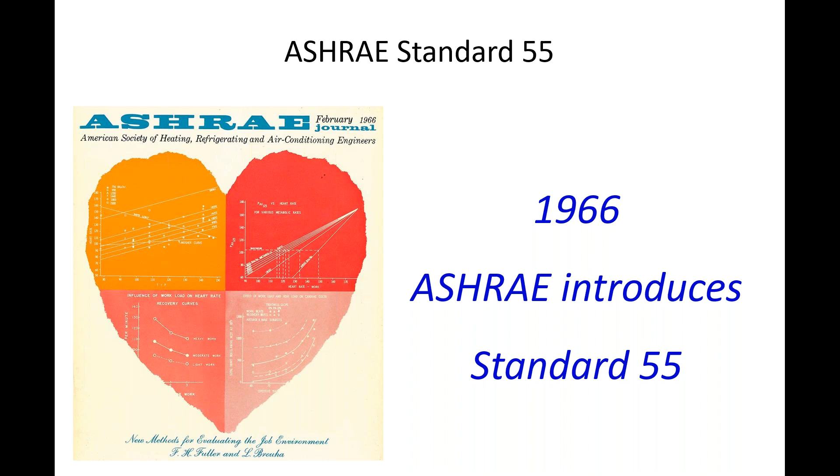What really brings us together as a global community is that we all have a common client, which is the occupant, and the standards have been developed by a global community of researchers. So it's a very important document.

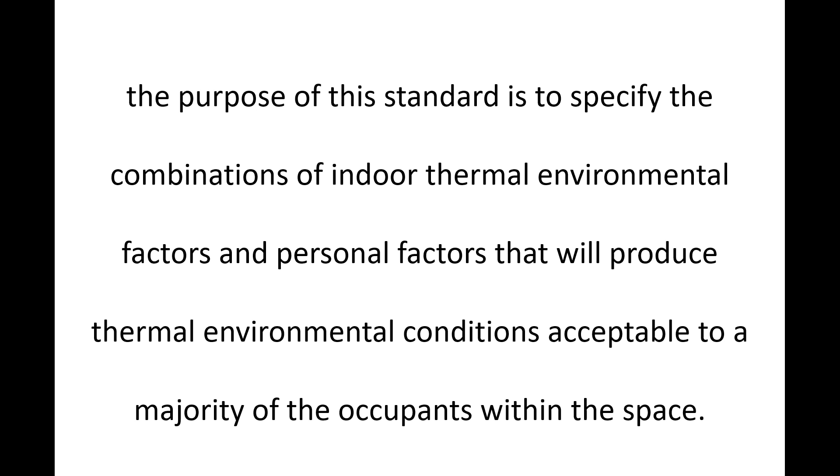The purpose of the standard was already read to you, so we won't spend too much on this, but we are trying to satisfy the majority of the occupants. One of the most important statements out of this is this concept of condition of mind, and you're going to see why this is incredibly important as we get to the mid part of the presentation.

First thing first, everybody, it doesn't matter where you are in the world, we all have very similar abilities to sense our environment. The physiology that we have is the same. And then we develop perceptions, based not only on our shared physiology but also our own personal experiences within the environments we're in.

From that perception we react, at a below-conscious level and an above-conscious level. So when we get overheated, we close the blinds, remove clothing, try to stay hydrated, try to find an elevated airspeed, cool surfaces to be next to. And if we get cold, we try to put on more clothes, increase the temperatures, try to find warmer radiant surfaces to be around. And so that is our reaction.

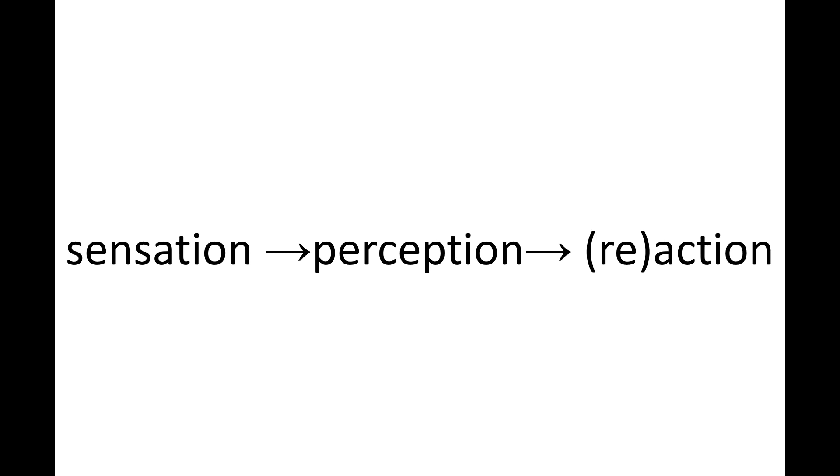But at a below-conscious level, the body already is controlling blood flow to and from the surface of the skin as a means of regulating the temperature. And this is done through regulation of hormones and our autonomic nervous system as it responds at a neurological level.

We won't get too much into the human physiology and psychology of it because this is more to do with the standard. But later this week, we're going to talk about the physiology in another presentation, and you can find information on that online.

One of the areas of debate has to do with the human body and the regulation of temperature. It's quite interesting because even within ASHRAE's own library, there is a conflict between the numbers. But if you look at the medical textbooks, the ASHRAE handbooks, the indoor environmental guidebooks, you will find that the dominant mechanism by which the human regulates its temperature, sensing and releasing, is through radiation.

This is why enclosure design is so important, because as practicing engineers and designers, we know that the differential temperature between two surfaces is going to be driven by the Stefan-Boltzmann constant and then also the emissivity and the delta T.

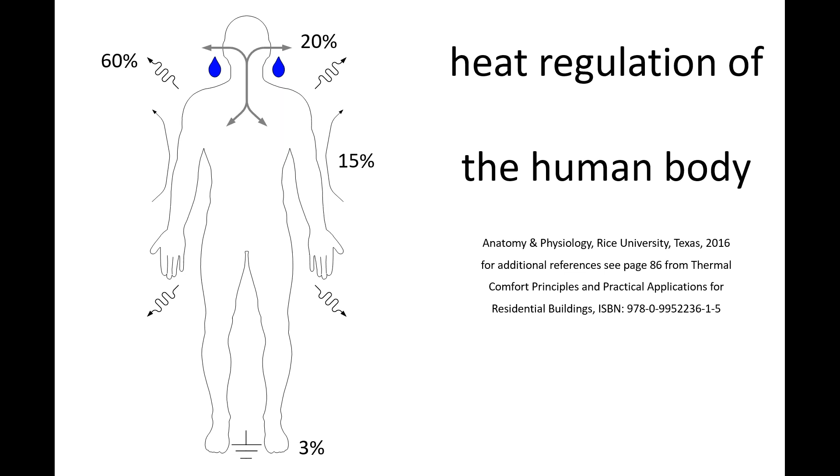The surrounding surfaces around us are incredibly important. It's only when you get into really high performance buildings or interior spaces that the dry bulb temperature, the air temperature, and the mean radiant temperature can often be assumed to be the same. But if you approach the exterior of the architecture, where there's a lot of glass, depending on what's happening outside, the inside surface temperatures can get incredibly hot, or where I'm from, incredibly cold, and this will have a huge impact on our radiant experience in the space. So it's important that we understand that.

As I mentioned, the neurological system and hormones in the body regulate temperature, and it's a beautiful system. If you think about it, the body doesn't need any batteries. You don't need to read a 27-page programmable thermostat manual usually written in a tiny font, very difficult to read. As long as we stay healthy, the body will do its own control to regulate the core temperature so that we are in a place of homeostasis.

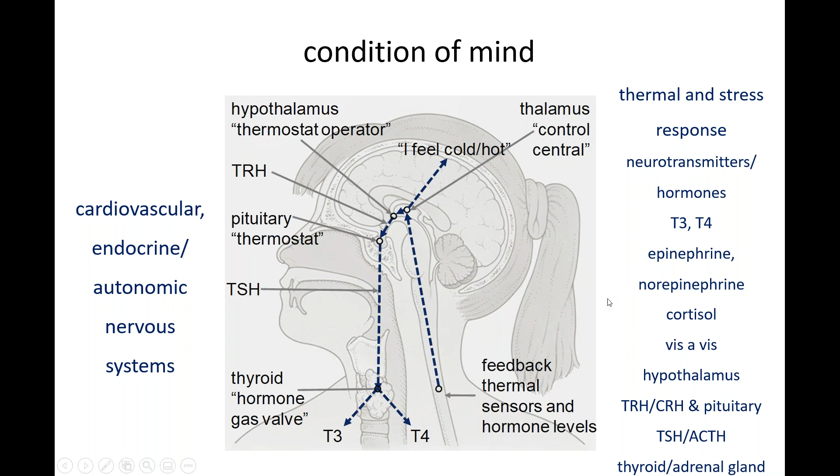I'd suggest for those online that you join us later on Thursday to learn more about this - we'll go into it in detail. If you can't join us, I'd suggest you go online and within half an hour or an hour of study, you'll learn about the physiology and psychology of thermal comfort as it relates to our own bodies and how we sense, perceive, and respond at a below-conscious level.

One thing we see often all over the world is the tension between what building codes require for thermal comfort and what people actually experience. It's amazing that building codes for the most part establish the lowest requirement before there's a failure. So in the education world we'd say you can operate or design a building to a D grade, the lowest grade before failure.

That D grade says we should do heating and cooling load calculations, take some air out, put some air in, and as long as the control device, typically a thermostat, can maintain 22, 24, or 18 degrees depending on what part of the world you're from, you'd be in compliance with the code. This is often interpreted as being a proxy for thermal comfort.

But the reality is that people in the space experience much more dynamic environments. The sun shows up every day and loads the building with shortwave radiation, some of which comes through the glass depending on the solar heat gain coefficient, and that energy is absorbed and then re-released into the space as long wave radiation. We also have sunlight hitting the solid surfaces of the building, getting conducted through, warming up the inside surfaces, which also get released as long wave radiation. So you have shortwave radiation and long wave radiation.

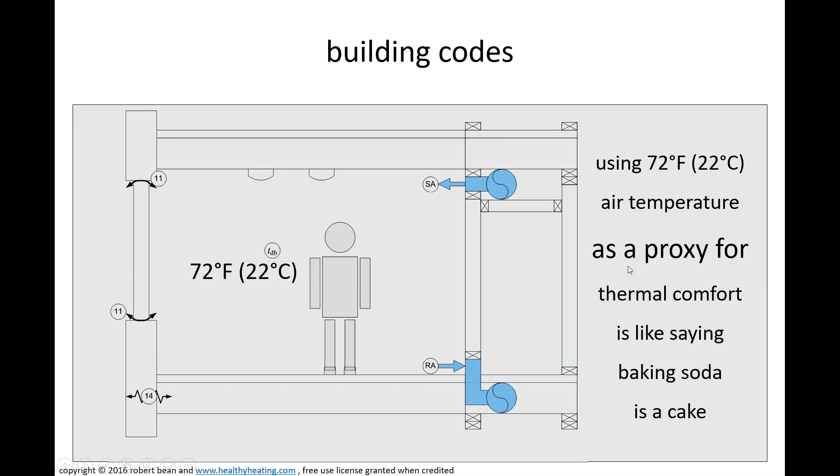This is reality, where this is not - the building codes do not represent what people actually experience in a space, but ASHRAE 55 does, and this is what the standard is all about. Often people, particularly if new to it, can get intimidated by what's going on, but the reality is that if we just sit still in a room and enjoy our sensory experience as a human, we will experience all of the things that are in Standard 55.

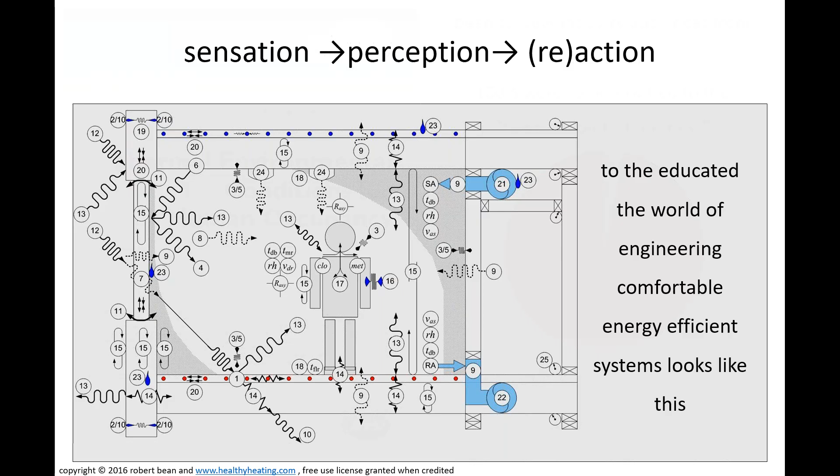So though it might seem complicated, in reality each of us, wherever we are in the world, whatever building we're in or in the outside world, we experience all of these elements. So Standard 55 really defines those conditions - what conditions we need to create so that we have a higher probability of people being comfortable as opposed to uncomfortable.

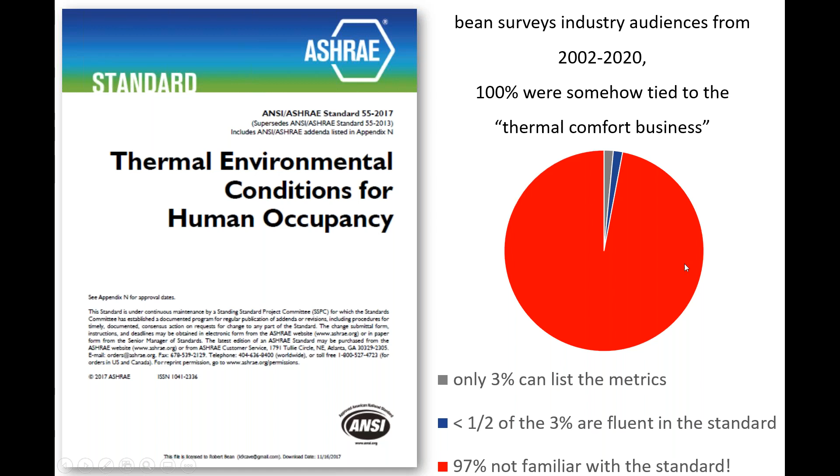This is a shock that we've seen such low literacy in the standard when that's in fact one of the most important ones we have. So I'm really pleased to hear we had something like over 1,300 registrants from your chapter efforts to bring people to this seminar. Congratulations on having so many people participate and learning about the standard, so you can now go apply it to your own practices and for the benefit of your client.

We know the Center for the Built Environment and other organizations around the world that have done research papers on post-occupancy surveys find there's incredibly low compliance with thermal comfort standards. When you think 80% to 90% satisfaction is the target rate, and yet we're only hitting maybe 2, 3, 5, something like 8%. Not very impressive. In fact, if any other industry, like the automobile industry, had only 8% satisfaction with their products, it would quickly be out of business.

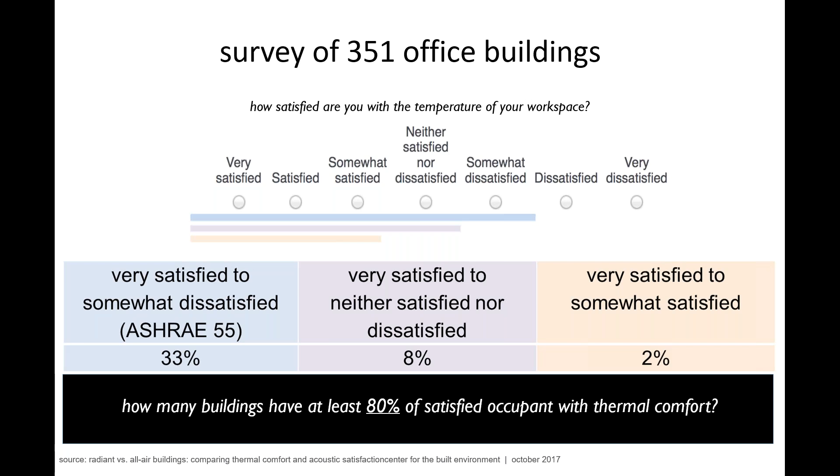So these are the things we need to address. We know what works and we know what doesn't work, and unfortunately we're right now in a state where we're developing lots of buildings that don't work when we know better. Part of that is us as a design community being educated and communicating what we know about people in buildings to the architectural community and the development community, and that of course is going to take time.

I like to look at thermal comfort as a cake, and the ingredients of the cake are represented up here on your screen. It's funny that we see a lot of parts of the world where they'll use air temperature, the dry bulb temperature, as a surrogate for thermal comfort. Well, if you were baking a cake, that would be like saying baking soda is a cake. It's only one ingredient. With thermal comfort, it's the same.

You have lots of ingredients. When you get the ingredients right - when the humidity is right, the air temperature and the mean radiant temperature are right, and you understand what people are doing and wearing in the space, and you control temperature stratification, floor temperatures, and this asymmetry - that will have a much higher probability of people enjoying the space and not being stressed out by overheating and underheating.

This really ultimately comes down to the objective of the standard: to reduce the stress level associated with thermal discomfort. Studies tell us that people get distracted by bad indoor environments, and in that distraction, they lose their productivity. They also lose their ability, in the case of education, to focus on whatever learning is required - maybe an exam, maybe studying engineering - these bad environments become a distraction, and they can lead to stress.

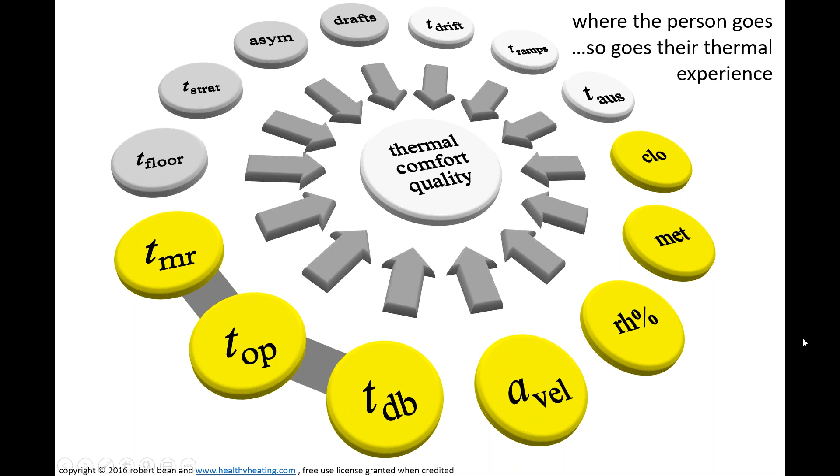We know the stress at a residential level and even within office spaces can be high between colleagues as you develop these wars, these battles - which is not gender-based, by the way, it's more to do with the clothing than anything else. So these, in fact, are the ingredients, and we can summarize them in a table looking at the two personal factors: what are people doing in the space and what are they wearing? We have what's called within the standard the representative occupant - the modeling voice that says, okay, I am this person in this space doing this activity, wearing these clothes, and I will represent all the other people in the space in the same scenario. But if that changes, if the clothing changes or the person does something different, now you have two situations to evaluate.

We have the general environmental factors - these are applied in all assessments. Whenever you do a compliance check to ASHRAE Standard 55, you have to look at these 4 conditions: the air temperature, the mean radiant temperature - which is the surfaces around the person and how that influences the radiant exchange from the occupant to these indoor surfaces - the humidity, and the airspeed. I should also point out that these values, when we do a compliance assessment, always relate to the person, so where the person goes, so goes their experience of the space. When we talk about mean radiant temperature and dry bulb temperature together, when you marry them, it's called the operative temperature.

This is in fact what people sense as the operative temperature—not dry bulb, not mean radiant, but the two of them together. So where the person goes, so goes the operative temperature. And because operative temperature includes MRT, where the person goes, so goes the MRT. So this is what's really important.

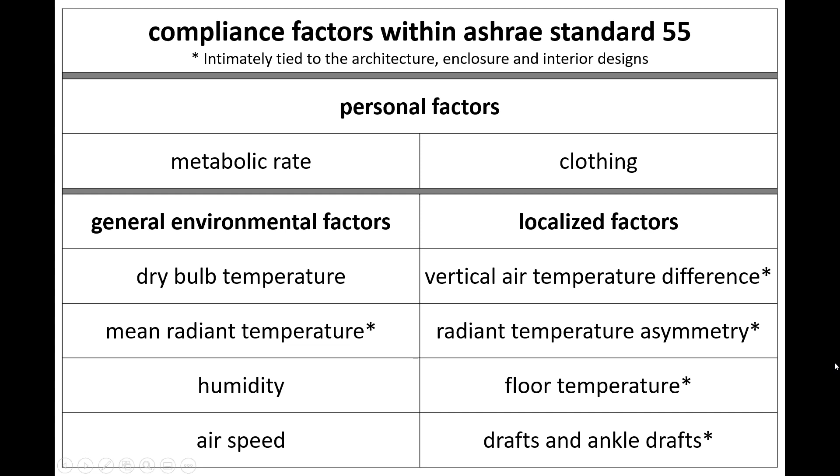So all of these together, I want you to see as the ingredients in the thermal comfort cake. And when we get these things correct, we have a much higher probability of having happier occupants.

That really was the study of Dr. Fanger and all of his predecessors and colleagues around the world, and of course his work at the Danish Technical University. They looked at it and said, well, if we get everything right—the architecture right, the enclosure design right, the interior design right, and the mechanical systems—then the probability of people voting on a scale from neutral to hot or neutral to cold is that they will vote mainly between slightly cool and slightly warm.

We say that's sort of the 0 plus or minus 0.5 on the predicted mean vote, PMV. And what they then did is tie the PMV to what's called the PPD, or the predicted percentage dissatisfied. So we know that when we get everything correct, those voting in the 0 to plus or minus 0.5 range, there will be a very low amount of people dissatisfied.

But if we start to get any of the criteria incorrect—large mean radiant temperatures due to large window-to-wall ratios, poor fenestration performance, or thermal bridging in cold climates, all of these types of things—people will start to vote at a much more aggressive number. So they'll go from, say, neutral or slightly cool to cold, or up to warm or hot. And of course these numbers then correlate to much higher dissatisfaction.

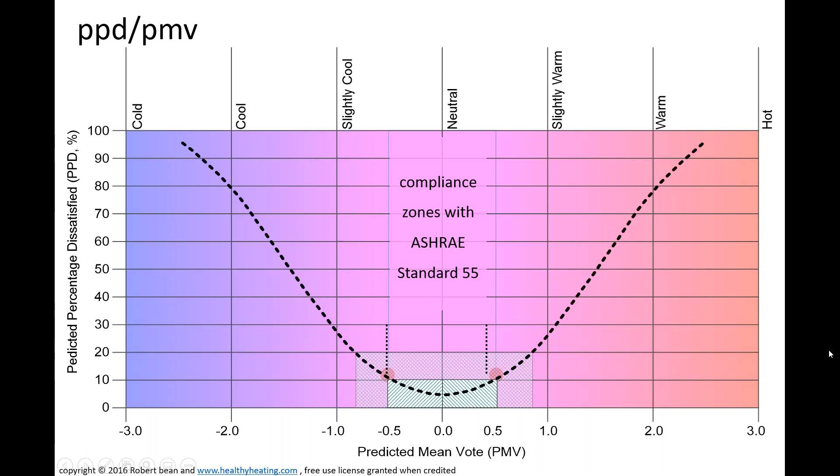So we know from our own worlds of design and practice what buildings work and what buildings don't work, and we can actually make these predictions before we start excavation of the building. This is important—that we have these discussions ahead of time with the client, not during construction, not after occupancy, but before the design.

So clothing plays a big, big role, and we see this all over the world. The news people particularly want to make the thermostat war a gender issue, but it's not a gender issue at all. It has a lot to do with the clothing, and we can see in office spaces all over the world that when you take males and females in a space together, oftentimes, depending on your culture, the females will be wearing a little bit less clothing than the males.

The males will be more formally attired, sometimes ties, jackets, these types of things. The women will be wearing dresses, skirts, blouses—more lighter clothing. And it's the clothing that makes the big difference. There are some small physiological differences, but that does not explain the discomfort or the tension we see in office spaces or homes around the world. That has more to do with the clothing than gender differences.

And this, of course—it's funny because every couple of years a research project will come out supporting a statement about female versus male physiology differences and preferences. But when you dive deep into the research, you find flawed research. For example, they may have only studied females and never had a male cohort study to balance that out. Or both genders are brought into a research facility but not told to wear the same clothing, so they show up with their own personal preference of clothing. Then this research gets interpreted incorrectly as a gender issue, when in fact it wasn't.

Mean radiant temperature - ASHRAE standards handbooks tell us that at the low velocities typically found in buildings, up to 60% of the sensible heat exchange is radiant. So we can't ignore that radiant element. It is in fact the dominant mechanism.

So inside surface temperatures matter a lot. We have to be very aware of window-to-wall ratios and solar heat gain coefficients, and make sure that the structures we build don't encourage lots of thermal bridging.

As we know, the #1 rule in building science is what's on the outside wants in, what's on the inside wants out. On the outside is the sun, and that's a lot of energy it can dump onto a building - 700, 800, 900 watts per square meter. That energy will want to get inside, and of course that's going to affect the surface temperatures.

So we have to be able to control that with proper architectural design, making sure we try not to be so flamboyant that we can no longer control what happens inside the spaces.

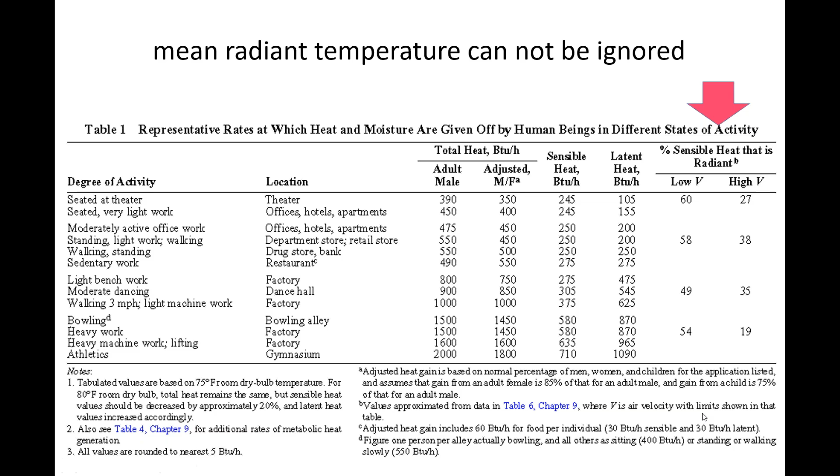This mean radiant temperature gets married to the dry bulb temperature, and you can then have what's called operative temperature. Operative temperature is in fact what people sense, so it's very much a balance. If the dry bulb goes down, the mean radiant temperature has to come up. If the MRT goes down, the dry bulb has to come up in order to maintain that operative temperature.

I've simply taken 3 examples of 3 operative temperatures based on the relationship between dry bulb and mean radiant. You'll have this when you download the slides or have the recording, and you can see how this works.

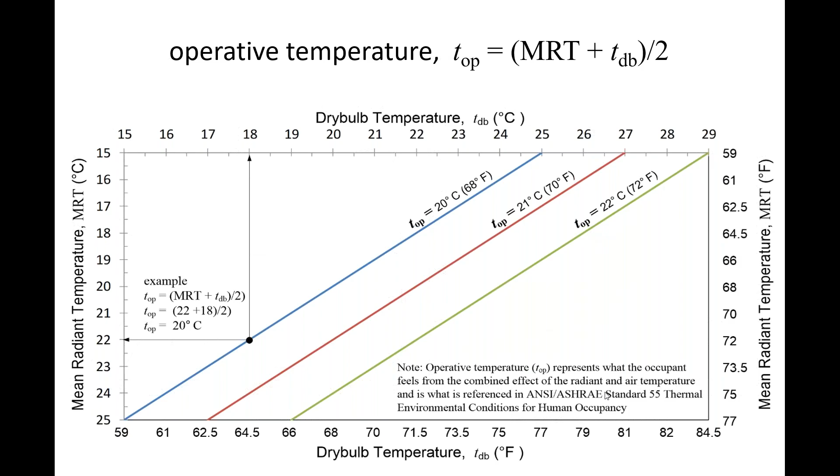In the perfect world, the dry bulb would equal the mean radiant temperature, but that only occurs in the interior spaces of buildings, or in really high-performance enclosures where we have very low fluxes.

In the real world, the sun is dynamic - it transits, it moves - so the temperature will also be dynamic and change. It's very ambiguous, people's experience in the space as a result of any radiant influence. If you can control the radiant influence, then of course you can make it very homogenous.

You don't have these battles, but people like to see nice, beautiful views, and so we have these flaws, these weak points in the building. Until we get that fixed, we will see ambiguity within the thermal environment as long as we see it.

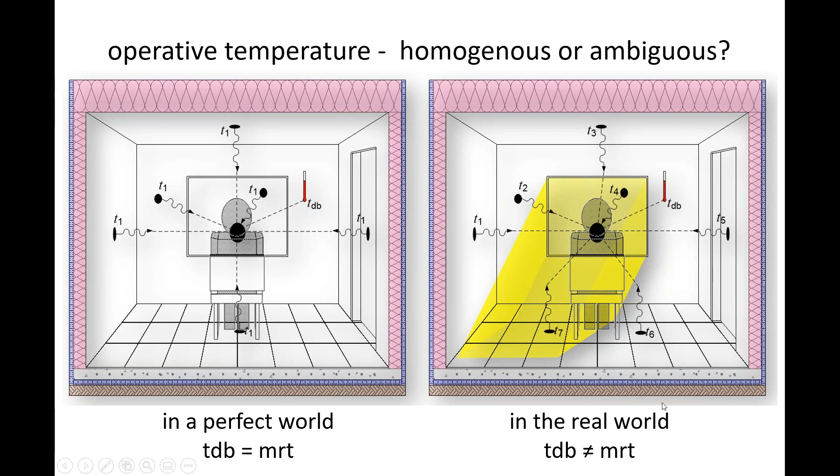But that also creates other problems, like the destruction of interior finishes. If you want to destroy a synthetic carpet, for example, all you have to do is hit it with shortwave radiation - it turns into gases and particles. So now you have an indoor air quality problem. You have a lighting problem, an air quality problem, and a thermal comfort problem, all because of overglazed architecture.

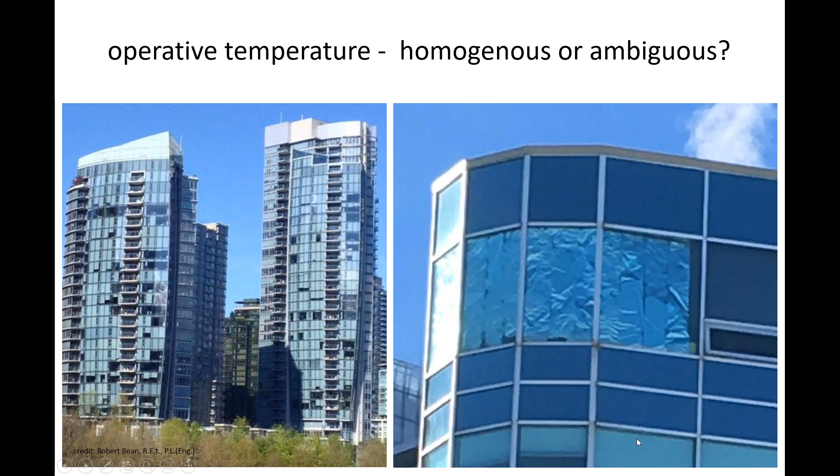These glass buildings are also very good at transmitting sound, so when you have lots of glass, it's very difficult to control the sound - you have sound problems. So we have to really challenge the architectural community globally on these styles. Is it really necessary to have these glass buildings?

Just to put it into perspective, I was told today that in Dubai it was like 45 degrees Celsius. We never get to 45. On a good day in Calgary we might get to 25 degrees Celsius - like today it will be 17 or 18 degrees C.

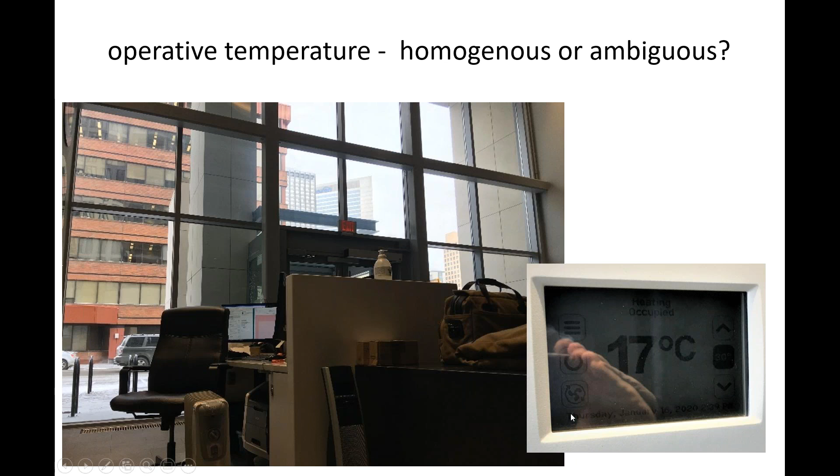That's a nice day for us. If we can get to 25, it's a great day. But in the wintertime, we design for minus 35, minus 40 degrees Celsius, incredibly cold. You throw a cup of coffee in the air, it freezes and crystallizes before it hits the ground. And so we have architects here, like everywhere else, that want to use a lot of glass. There's no way we can provide comfort in these spaces. You can blow hot air into a room like this all day long, that glass temperature, even if it's high performance glass, triple pane, triple sealed, argon filled, doesn't matter. The glass inside surface temperature at minus 40 degrees Celsius will be approaching somewhere around 8 to 10 degrees C. It's incredibly cold, so that's important.

Also important is humidity, and for many reasons we need to control it. That's a big discussion these days with COVID-19, maintaining this 40 to 60 range. I personally like to say 35 to 55, plus or minus 5%, which gives us some wiggle room. This mid-range has been demonstrated in laboratories, research work, and also in projects like hospitals, that virus transmission is much lower with these mid-range humidities. There's many reasons to control humidity, including thermal comfort, which we'll show you later.

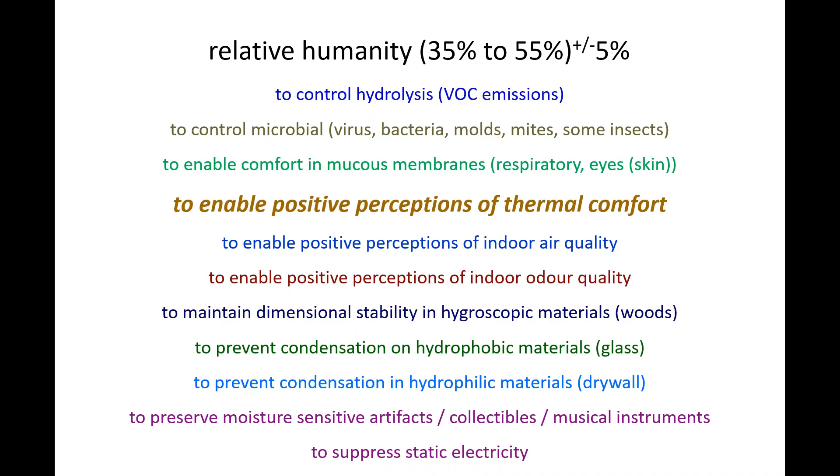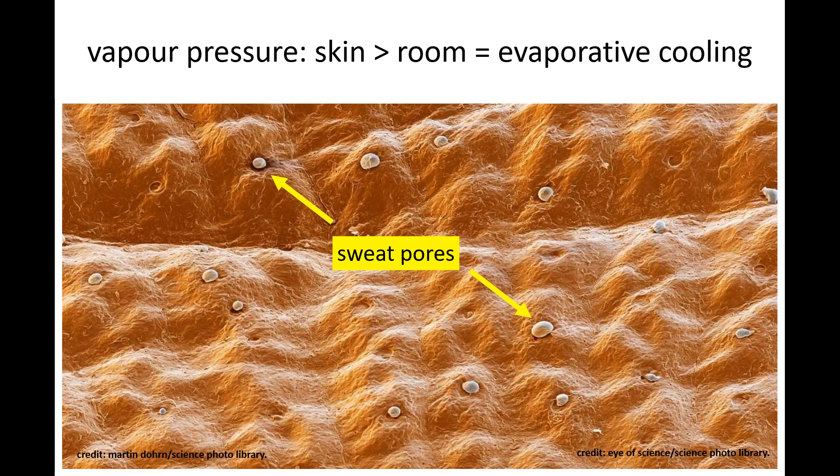Humidity in terms of thermal comfort controls the vapor pressure in the room. If someone is overheating, and the vapor pressure on the skin is higher than the vapor pressure in the room, then the release of moisture through sweat and perspiration takes with it both sensible and latent heat, and in that process we get cooling. But if the vapor pressure in the room is high because of moisture content, that gets suppressed, and the body can no longer cool itself through evaporative cooling, so it begins to overheat. Humidity control is important.

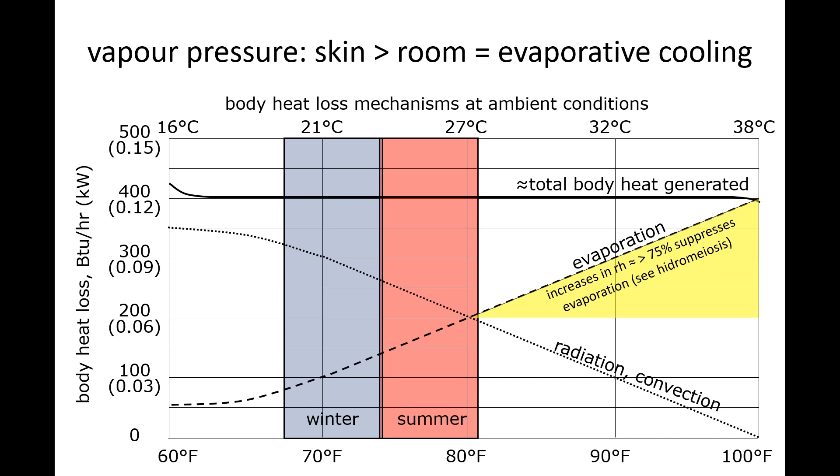We know that when you get into the higher temperature ranges, say 25, 26, 27 degrees, the body shifts from radiant and convective cooling to more evaporative cooling. Of course, evaporative cooling works only if the vapor pressure in the room is lower than the vapor pressure on the skin. This is why we need to control humidity if we want to actually cool.

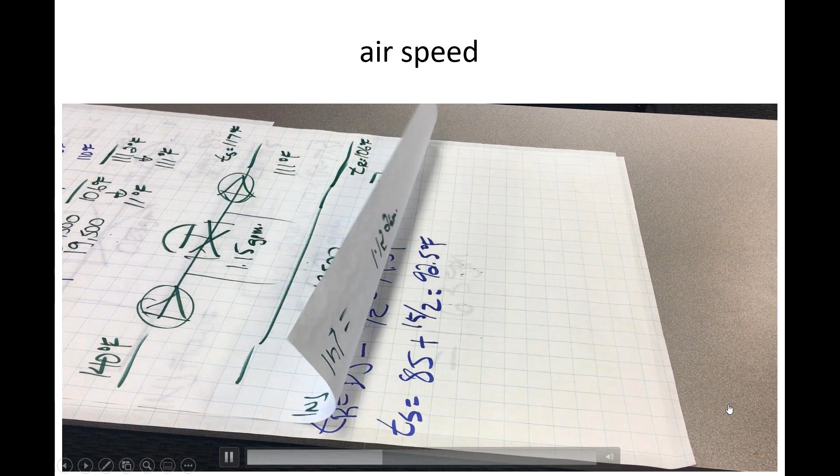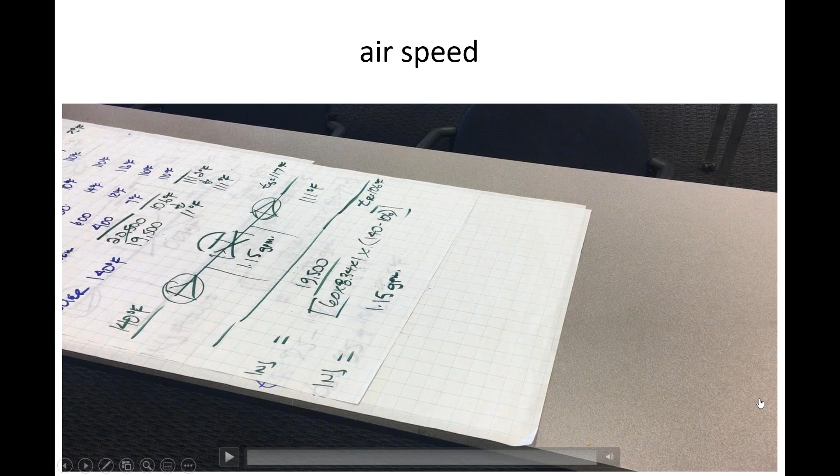The other thing is airspeed, and I'm going to play this animation. This was actually in a room on a person's desk. We were doing some training, and that's the formula that's there in the drawings. This airflow can be comfortable for many people if the room is warm and humid, and if they're wearing lighter clothing, this air velocity can provide some convective cooling. But in the wintertime where I'm from, this would not be comfortable at all. It would cause a tremendous amount of discomfort having these kinds of airspeeds.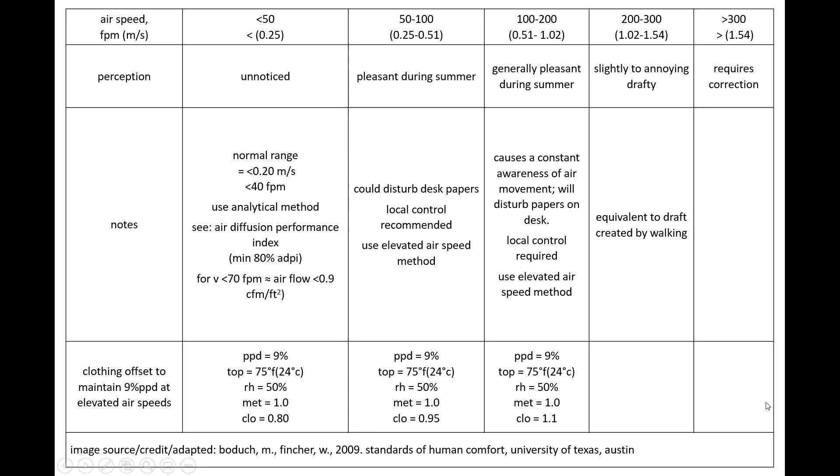This becomes a bit of an issue for us, and one of my current concerns has to do again with COVID-19: will the use of elevated air speeds cause an increase in transmission of the virus in indoor spaces? We don't know this yet, but it's a question mark.

Then we have what's called radiant asymmetry. Radiant asymmetry is the experience a person has when they're exposed to different surface temperatures on either side of them or above them—warm ceiling, cold floor, warm wall, cold wall. The body doesn't like it when the values are extreme. So let's take, for example, someone in India who maybe has an office building with a very large window-to-wall ratio, and the occupant is close to that window.

It's quite possible that the inside surface temperature of that glass is very, very high. And if that building is air conditioned, there will be an opposite temperature effect on the other side of the person. Having the experience of hot on one side and cold on the other causes discomfort, and the body does not like having such large changes. We call that radiant asymmetry.

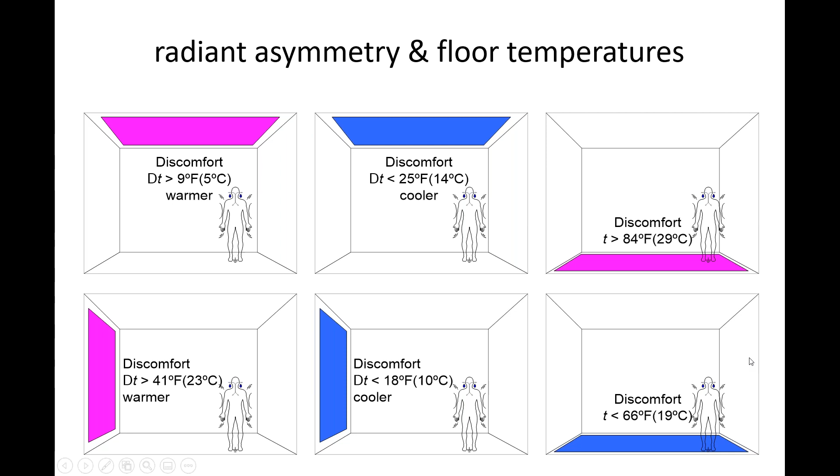In low activities and low clothing, floor temperatures have to be considered. From the work that Bjarne Olesen and Fanger and others did in their studies, we know we don't want floors providing heating to exceed 29 degrees Celsius or 84 degrees Fahrenheit. And from a cooling perspective, we don't want temperatures lower than 19 degrees C or 66 degrees Fahrenheit. Otherwise, the percentage of people who complain will increase as a function of these temperatures.

Here are some examples. Again, I'm from a cold climate, so a lot of the pictures you're going to see are from my experience, so maybe you'll feel sorry for me. When we get to minus 40, if you see that in the news, just send us some warm weather, because we need it. But when it gets really cold outside, you can have these cold walls.

In this case, they're using glass block construction, and they're compensating for this discomfort with radiant heating. But the radiant heating also provides that other extreme. You can imagine the radiant asymmetry that occurs in the space, but also the floor temperature.

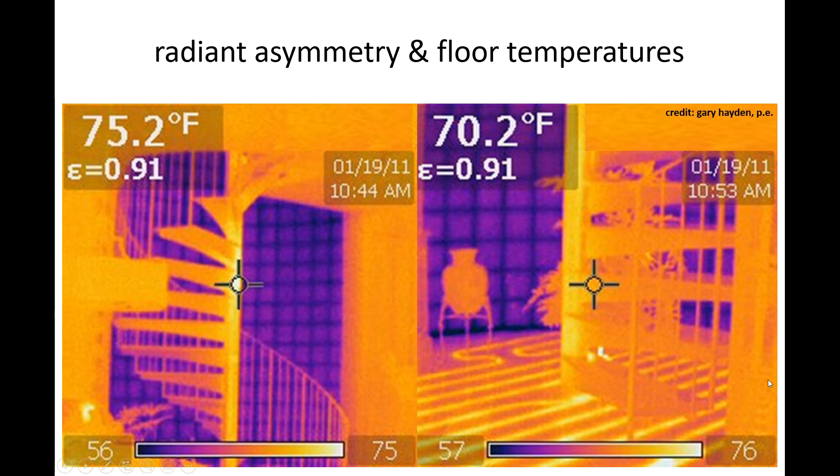Now, this space that you're seeing here, though, is not occupied for more than 15 minutes. The standard basically says if it's just a transitory space, like someone walking through it, the standard does not apply. The person has to be in there for some period of time for the standard to apply. So even though you might have spaces like this with problems of radiant asymmetry, if no one's occupying the space, we're just conditioning it and the person walks through to wherever they're going—not a problem.

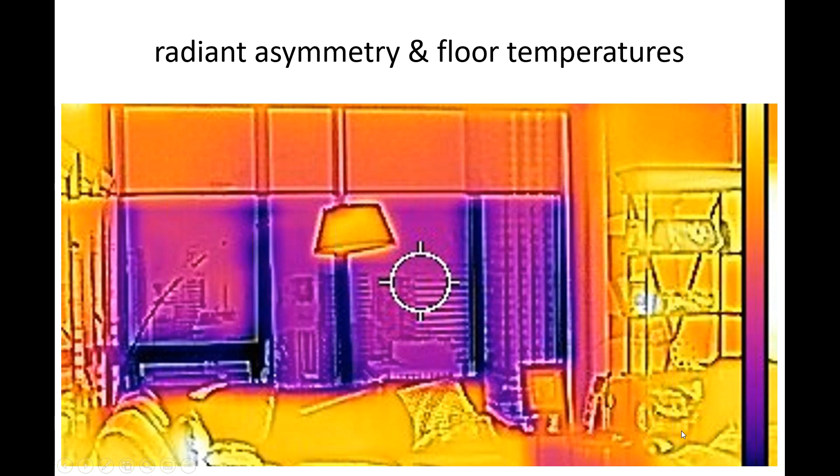But we see asymmetry when we get into, say, condominiums. This is a place where there's a large window-to-wall ratio, and the fenestration is not the best. In this case, it's a heating mode where the outside is very cold and inside you can feel asymmetry there. You'll also get draft in this case as well.

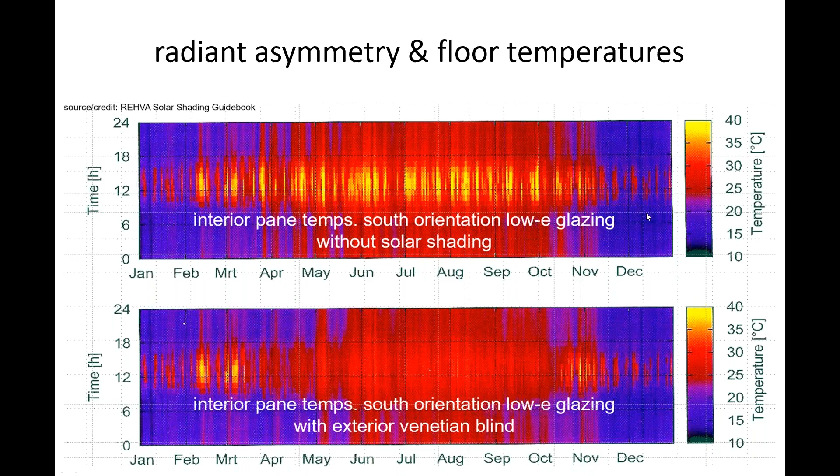Here's an example that came out of the REHVA guidebook. I love this illustration because it looked at interior pane temperatures with or without solar shading. You can see there are some incredibly intense temperatures on some of these inside surfaces, 40 degrees Celsius. That's a warm surface temperature to have to work next to in the summertime. So controlling that is important.

And the stratification—again, the temperature difference between the ankles and the head. You should know that the standard goes through reviews and revisions on a regular basis, and one of the things we are evaluating right now is that stratification number. We're considering allowing a much more aggressive difference compared to what the old document tells us, but it still needs to be considered.

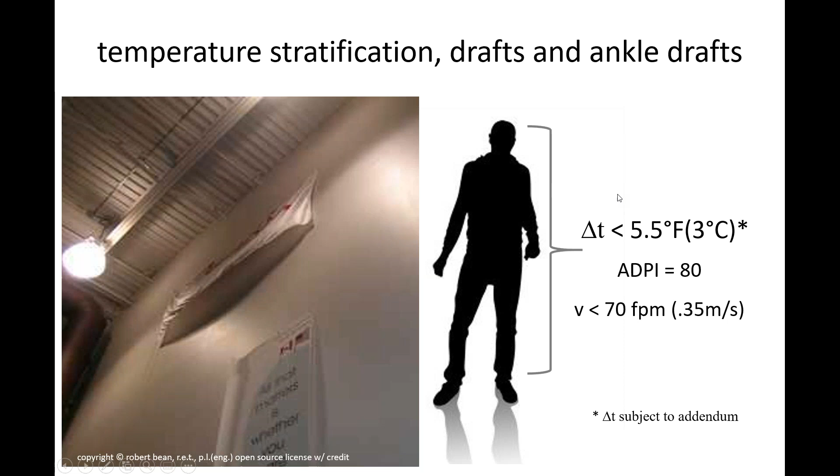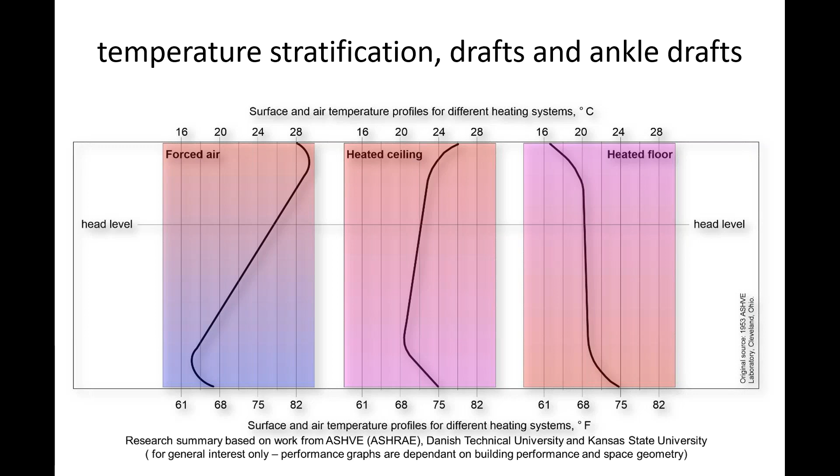We know different types of heating systems create different temperature profiles, but this is also a function of the building. When you get bad buildings with air-based systems, you're going to have a different stratification than if you have a really high performance building with another type of heating system. So the heating systems matter, the architecture matters, the mean radiant temperature matters—all of these affect the stratification.

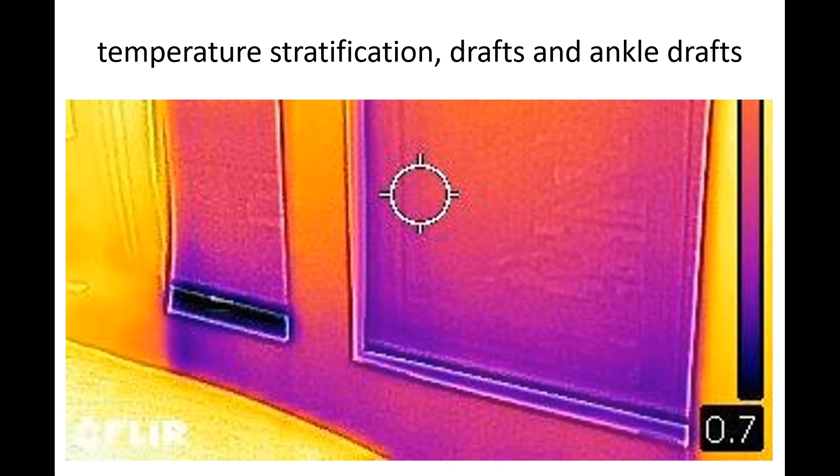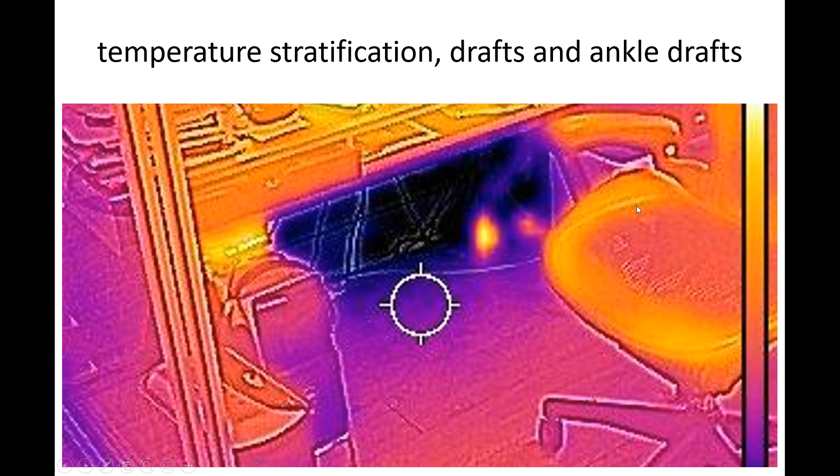Then of course there are drafts—warm temperature hitting a cold surface changes the density, having the air drop down; same thing with cold hitting warm, changing the density and having it rise up. So you get this air movement as the mass of the air changes its density, and thus its buoyancy. Here, it's underneath someone's desk in a very cold climate. Again, the thermostat could read 20 or 22 degrees and be in compliance with the building code, but what the person experiences is something completely uncomfortable because of flaws in the architecture and enclosure design.

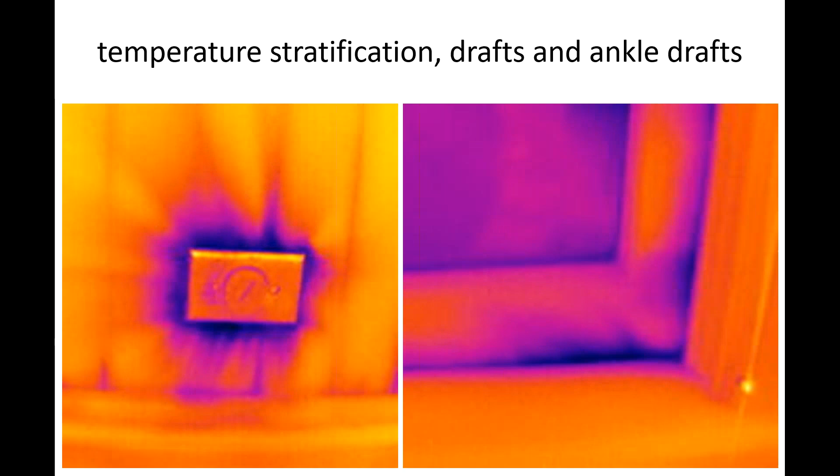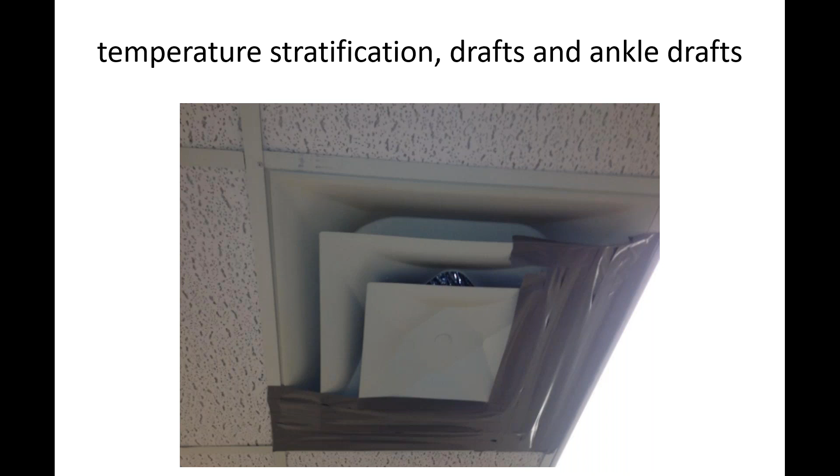Same thing with infiltration and exfiltration through building features like doors, seals around windows, electrical plates. All of these will create discomfort, even though the control device might be perfectly satisfied. And then we get people who will do whatever it takes to become comfortable in space, controlling drafts by taping up the diffusers in the ceiling.

So that's sort of the standard. We have the general factors, the local factors, the personal factors—these are the ingredients of the cake. When we get the architecture right, the enclosure right, the interior design and mechanical right, then we'll have a high probability that people will be comfortable, or a low probability that people will be uncomfortable. And of course, that is the objective.

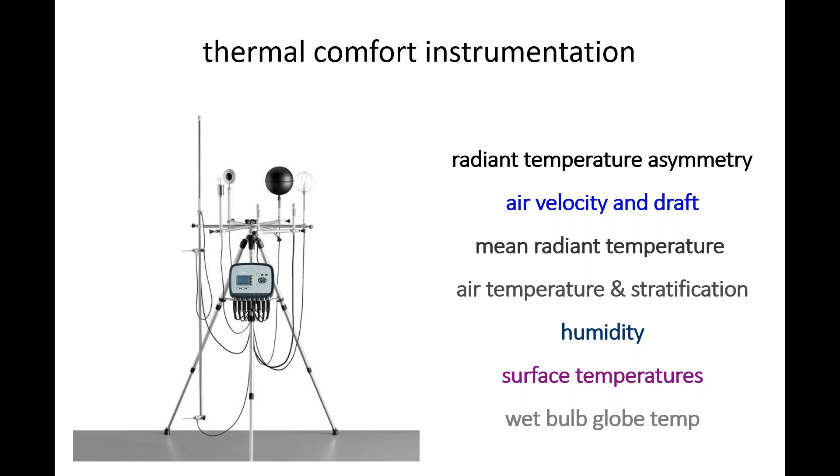These metrics can be sensed with instrumentation, so we can write the specification, measure it, and determine whether we're in compliance with the standard or not. One thing I do want to talk about: there is in the world of thermal comfort a discussion about these sort of static environments, and in fact, are they good for occupants or not?

The tension in this discussion is between the term homeostasis, the body's desire to be in a balanced state, and alliesthesia, which is the exercise the body gets from a thermal point of view. In other words, people who are out walking in hot, high temperatures outside develop an overheated sensation, but then they go inside where it's cool and air conditioned, and that change becomes something perceived to be incredibly desirable. There's a wonderful feeling of going from really hot to really cold, and that exercises the body's response system.

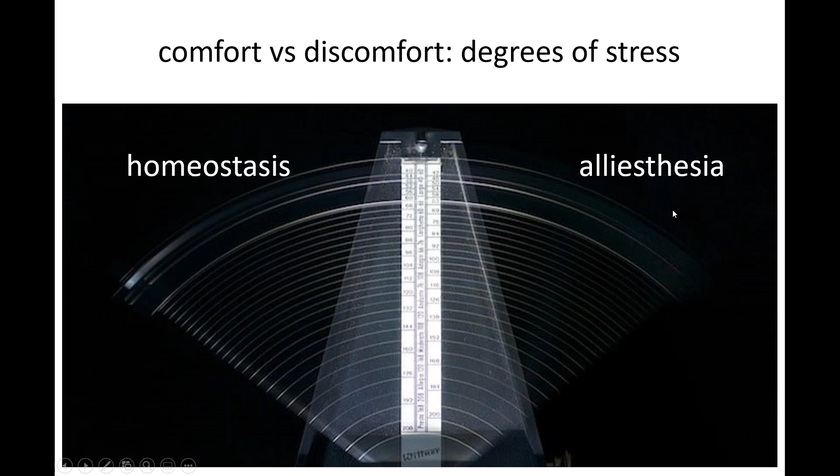This is defined by the word alliesthesia, and our job as designers is to try to understand what is good alliesthesia and what is bad alliesthesia—in other words, degrees of stress. The body always wants to go back to its center point, and we push it off balance by giving it this experience, and some of that experience is actually good for us. So that is the challenge.

All right, we're getting towards the end of the presentation. I want to go through some of the compliance tools. This is the ASHRAE Standard 55 and EN 15251 compliance tool. You can get this online through the Center for the Built Environment, or you can have access to it through ASHRAE when you buy the standard.

You can see on the left-hand side the input values: air temperature, mean radiant, airspeed, all the way down to clothing. On the right-hand side is the output, and it will tell you whether you're in compliance with the standard or not. The psychrometric chart creates a comfort zone and indicates where the person is in that zone. You can use the PMV, or predicted mean vote, or you can choose the adaptive method.

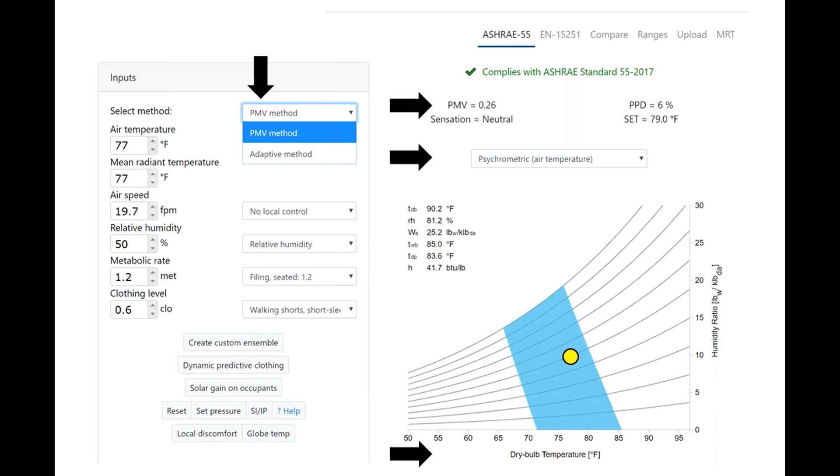In this example, with this combination of ingredients, we are in compliance with the standard, and the person is in the comfort zone. We can change the clothing and see the impacts just by selecting from the menu. We can also use a tool that allows us to build up our own clothing for the occupant, or there's a predictive tool as well.

I can tell you, say at 6 a.m., whatever the outdoor temperature is, and that will predict what people typically wear, and that has come about through some research work. But again, all of this, in this particular example, is in compliance with the standard.

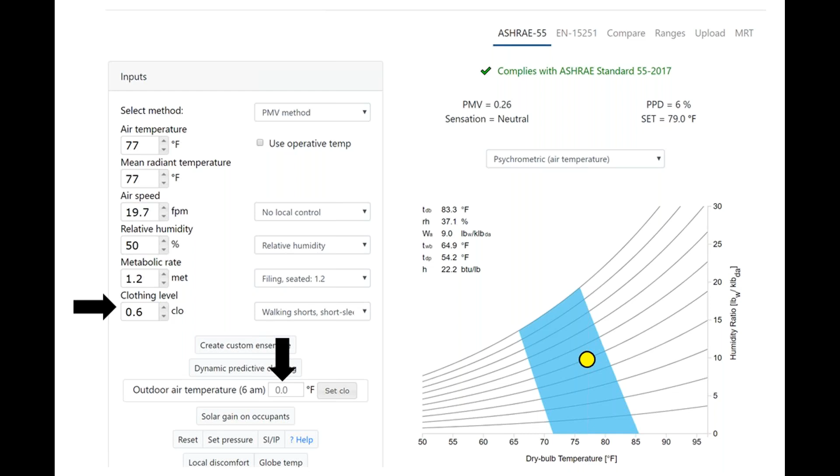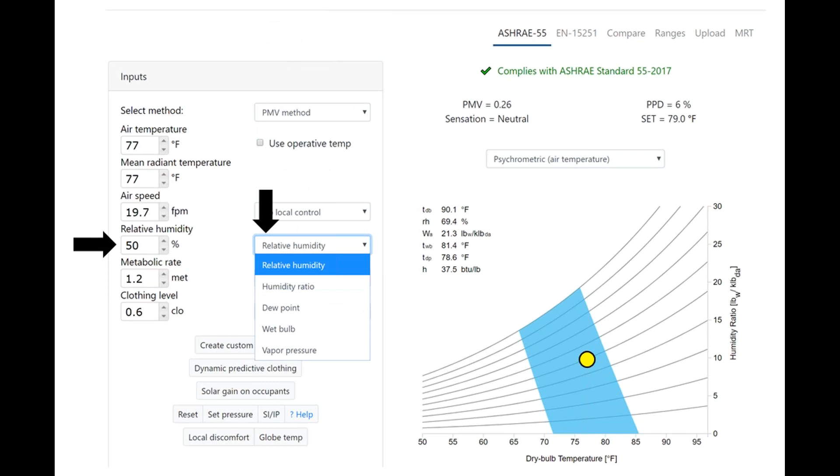We can change the metabolic rate depending on what people are doing in the space, whether it's a high or low activity level. We can change the relative humidity, and all of these are just input values into the standard. The airspeed is measured across the body at 3 locations. For the most part, it's very rare that you would have air speeds that would be uncomfortable if the systems are designed properly, like to an ADPI of 80%. Very rare that you would ever have discomfort due to that.

In the wintertime, maybe you have drafts or some air velocities with cooler temperatures. In this case, there would be a problem, but generally not.

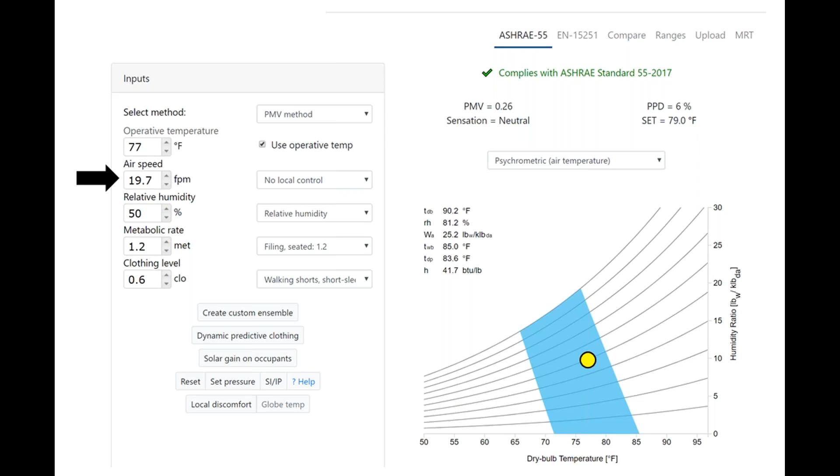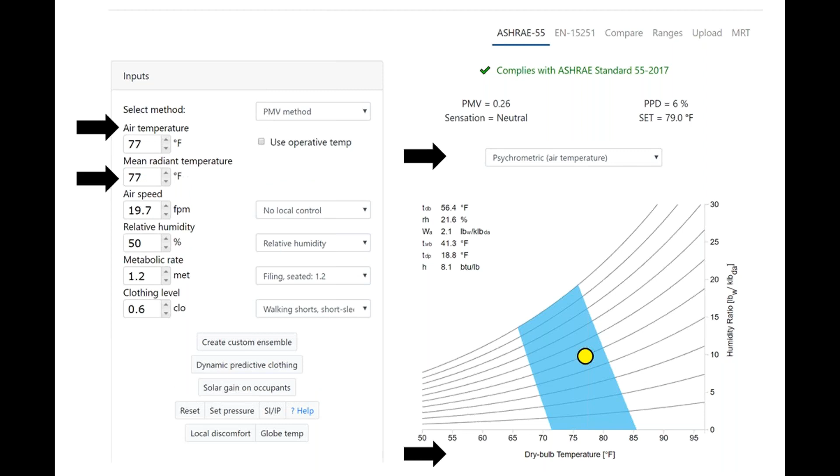Here we're showing operative temperature, which is the combination of mean radiant temperature and dry bulb. And we can change that from operative temperature to actually the input values for air temp and mean radiant.

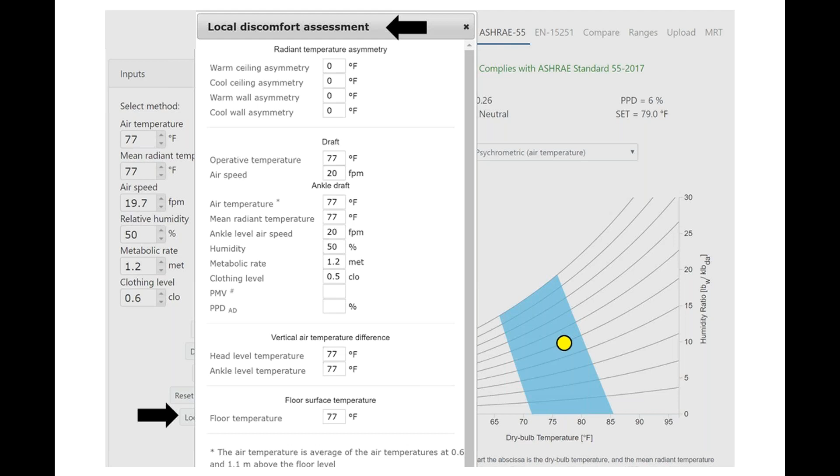Then there's the local discomfort assessments: radiant asymmetry, drafts, vertical air temperature difference, and floor surface temperatures. We can calculate these things, or we can make reasonable estimates as practitioners, and it will tell us whether we're in compliance with the standard based on local discomfort.

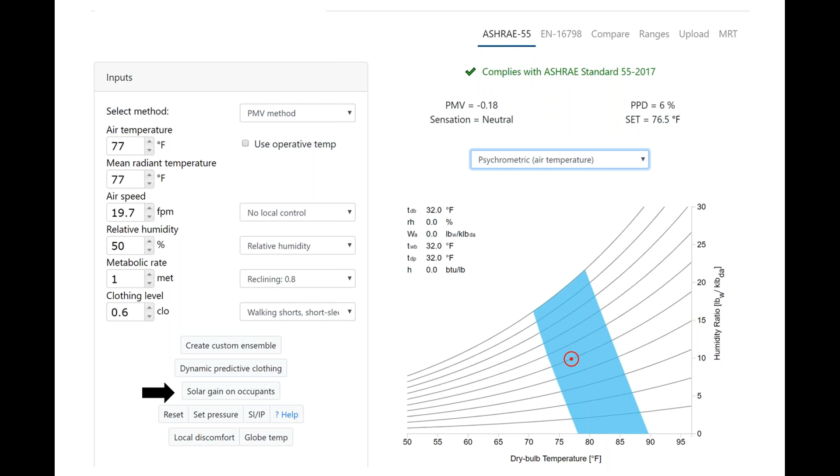There's a feature on here which we love, which is the solar gain calculation on occupant. It allows us to take a person, put them in a room, and look at the effect of shortwave radiation, using all of the input values that you see here.

These are described in detail in the publications from the Center for the Built Environment, also in the ASHRAE journal, in the standard itself, and in the online tool. So these input values will then tell us what the impacts are.

On the left-hand side it says mean radiant temperature 77 degrees Fahrenheit, and I apologize that this is in IP units. Strangely enough, in Canada, although we're educated in SI and taught to use Celsius, when you get out of school, everything has now gone back to IP, which is really unfortunate. But 77 Fahrenheit is probably like 24 or 25 Celsius, something like this.

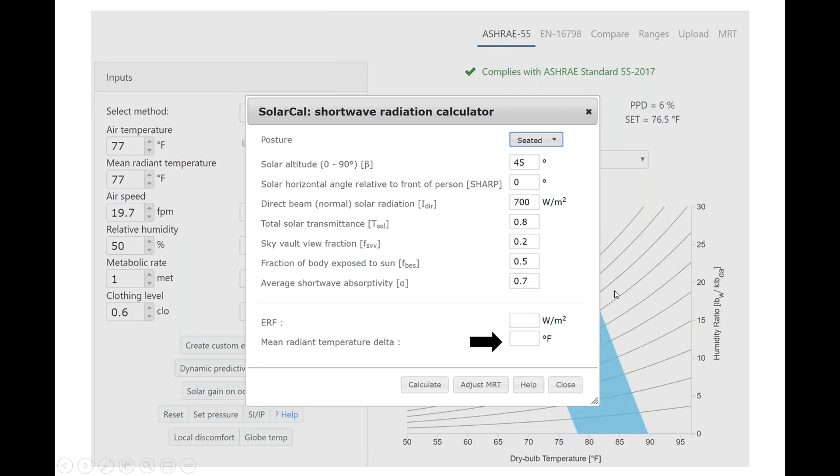You can see that if we look at the sunlight, direct shortwave radiation in this particular example, the offset creates like a 30-degree differential, and instead of the occupant sensing 77 Fahrenheit, now they're sensing like 105 degrees Fahrenheit. Considerably impacted by the shortwave radiation, and by making this analysis, we'll find that we're no longer in compliance with ASHRAE Standard 55.

So it's incredibly powerful when you're sitting with an architect and the client and everybody else, doing design charrettes where everybody sits around the table with the design professionals. You can draw attention to, well, listen, the design is beautiful, the building's very attractive, but you have a lot of windows here, Miss Architect.

And the client goes, yes, but we have a beautiful view of the ocean or the mountains or the prairies or whatever it is. And you can say, yes, it is a beautiful view, but if the sunlight comes through and this occupant is in this space and experiences that shortwave radiation, they will not be comfortable, and they will in fact close the blinds. So the view that you paid millions and millions of dollars for, people won't be able to see it because they will be uncomfortable.

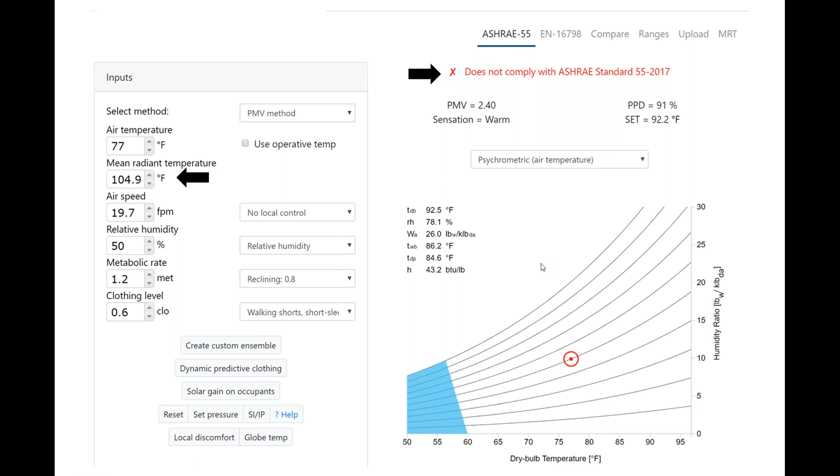It makes for very interesting meetings when you can demonstrate this with everybody at the table. A lot of this is about preventing discomfort in the design stage, not trying to solve it afterwards. That's really what this is all about.

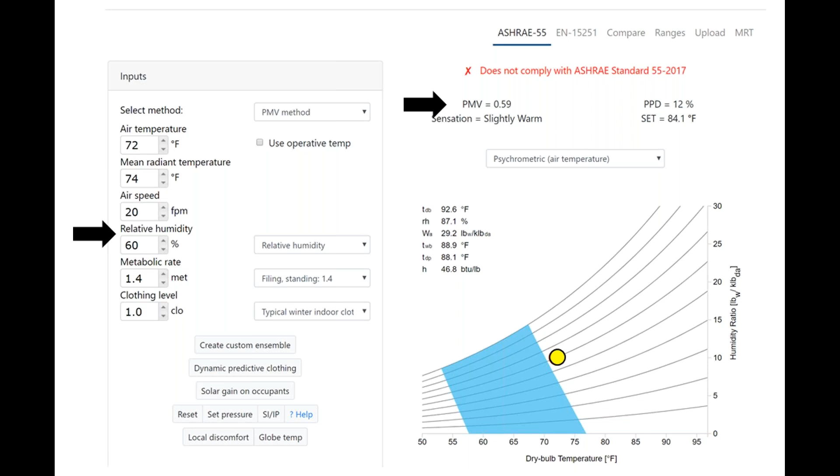So here's where relative humidity can be evaluated. We have a case here with these conditions: 60% relative humidity is not in compliance with the standard. A big part of that has to do with the metabolic rate, a larger metabolic rate, filing, standing, wearing some winter clothing in the space. If we can drop the humidity down to 35% from 60, we'll be in compliance with the standard.

Now, this change in humidity works from a thermal comfort standpoint, but then you also have to ask yourself, there's an energy penalty associated with bringing the humidity down that low. And now, with what we know about virus transmission, do we actually want to bring it down that low? So maybe taking it to 35% is not where we want to be. Maybe we want to take it to 45 or 50%, but then shift something else in the space—get better control over the mean radiant temperature, look at what they're wearing, maybe change clothing policy—something else that can be done to ensure compliance with the standard.

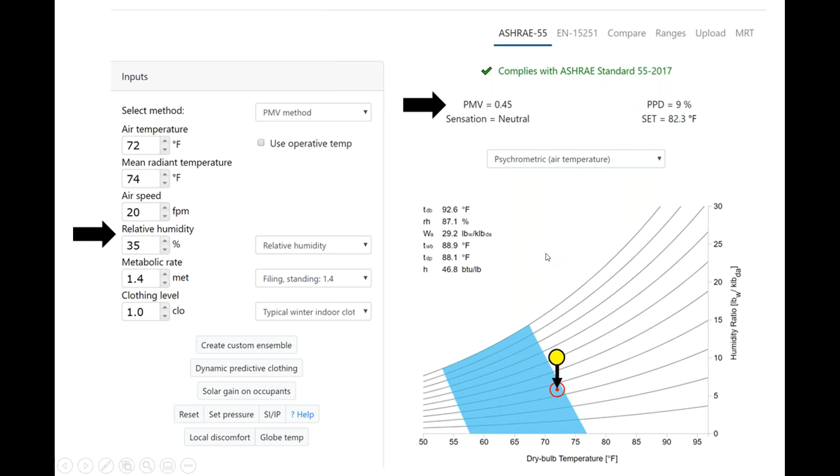The compliance tools will also do comparisons.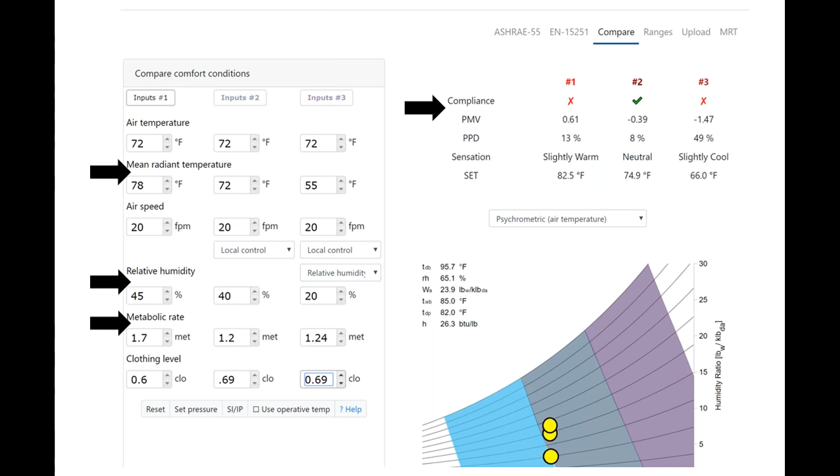So you can take 3 scenarios, which is very useful when you're looking at design and saying, okay, well there's these conditions, but what if we try these conditions, or maybe even try this other set of conditions, and what can we change in the ingredients so that we get compliance with the standard. The adaptive comfort standard is important, and you can see when you're in compliance or not.

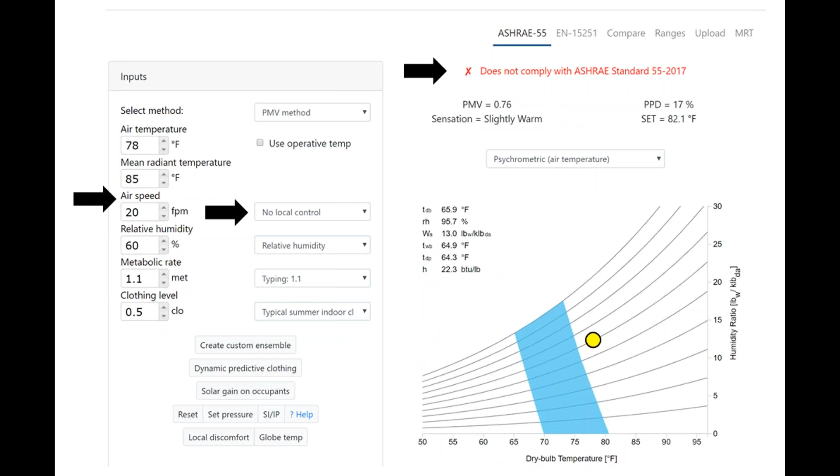This is looking at elevated air speeds. We can change the airspeed. There's tools like this one here, the CBE fan, so you can put ceiling fans in and look at the offset, the cooling offset that you get by elevated air speeds, and it will tell you that. It's a very useful tool.

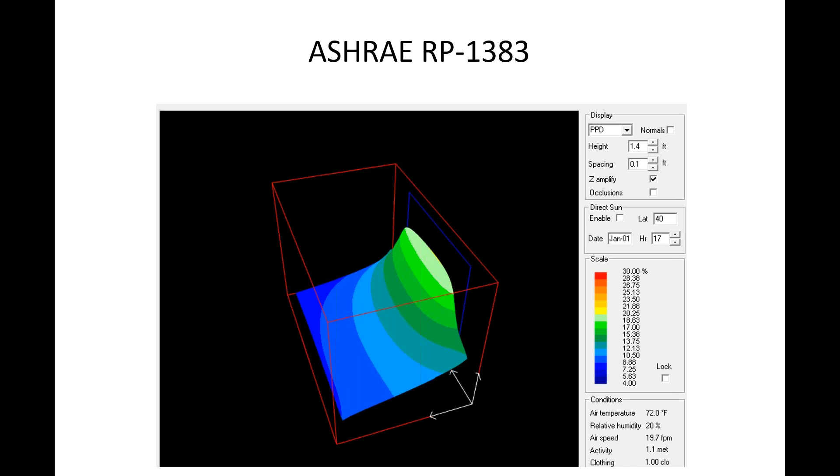The more advanced version of that, released a few years ago, is RP 1766, also available to ASHRAE members. So this is my presentation, and my motto has always been: design for people, good buildings will follow. When we use human physiology and human psychology as our base point for design, in other words, we take the body and design outwards so that we're serving the needs of the body, both from lighting, air quality, vibration, odor, sound, thermal comfort. When we use the body as the design metric, it will in fact tell us how the building should be designed. So design for people, and good buildings will follow.

Thank you, Robert, for this informative webinar. I received dozens of questions from the audience. I will start with the first question from Santosh. He's asking, is there any revision coming up for ASHRAE 55 2017, and when is it expected?